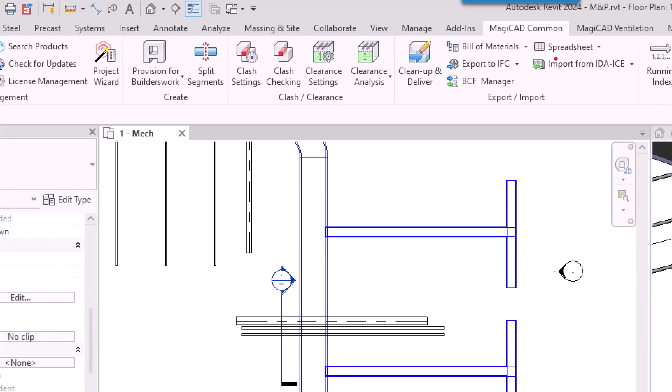So here, you can find this kind of function from MagiCAD Common. You can find a lot of useful functions here, like provision for Builderswork, clash checking, clearance analysis, and some kind of spreadsheet. A lot of useful functions here.

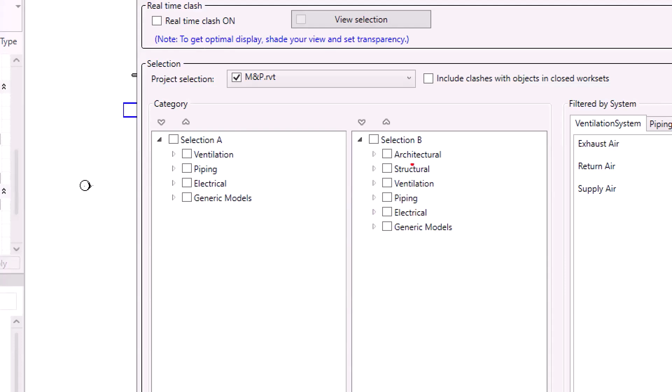Okay, so for this function, I will go through clash setting, and I want to check clashes between different disciplines. On the left side is for the MEP disciplines, and on the right side is for MEP and architecture, structure, all of disciplines here. So I want to check clashes between ventilation, piping, and also between ventilation, piping, and electrical. I want to make clashes, I want to check clashes between them.

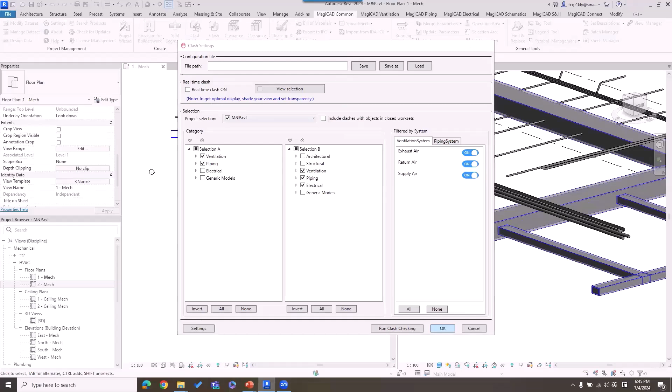And here you can find we also support clashes between the current model and the linked model. So here I can do clash checking for the current view, check clashes here, and get a report. With this report, you can check the 3D view for each clash.

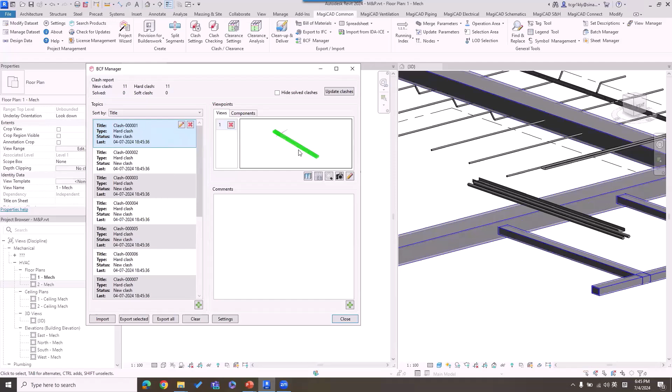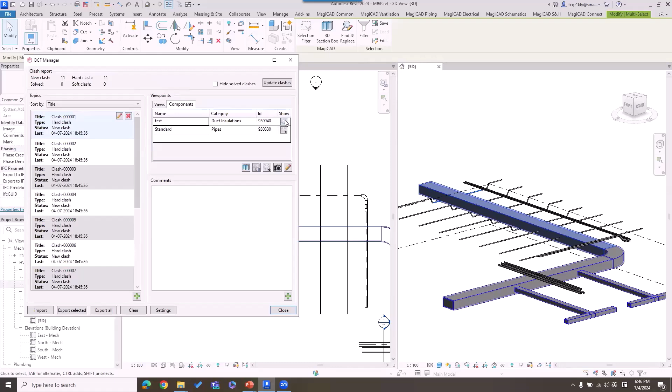Here we have this function to show the clash related elements, and it will locate them in the current view, like this one in the 3D view, for example. And I can also locate those certain elements like this, so that means you can find all of the clashes.

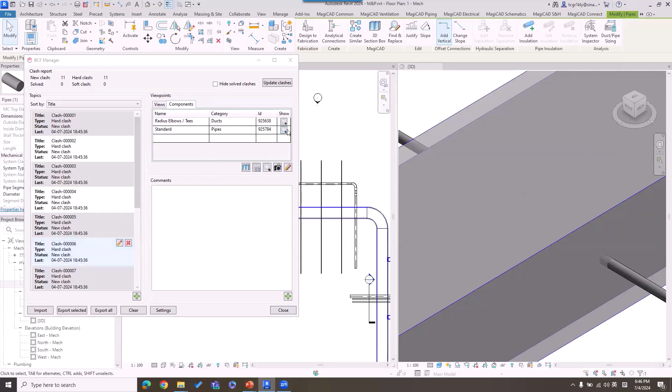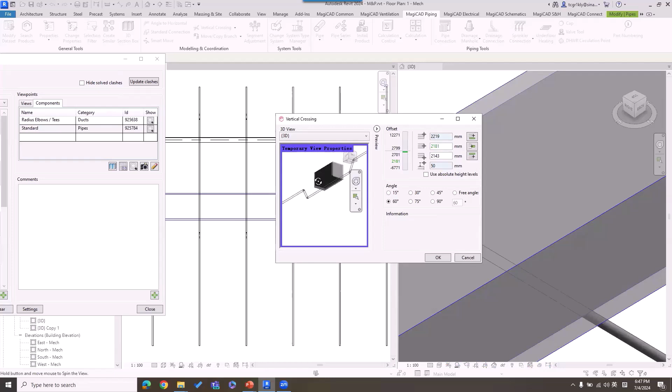For example, let me take some clashes here as an example. Here is a clash, and I want to fix it. You do not need to close this dialog. You can just locate certain elements in the current view, and then use our function like vertical crossing, and start from here to there, at the bottom of the reference one, make a crossing like this.

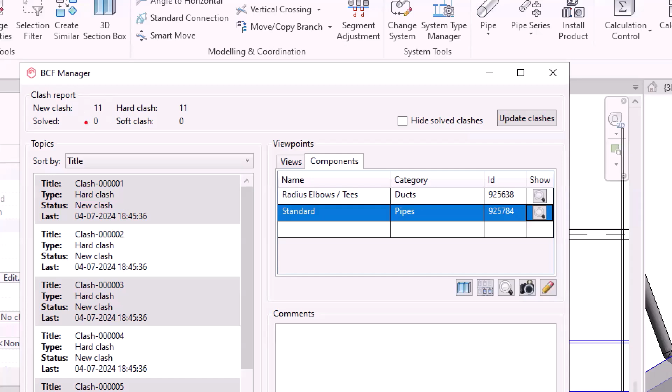Okay, I fixed a crossing, right? After I click close, let's check what happens to our clash report. At this moment, there are 11 new clashes here. New clash number is 11. And here we have the update clashes function, update, and check the result here. You'll notice I have solved 2. So that means you can check clashes in your project, fix them according to the report, and also update the report. So that is our clash report function.

And for this clash report, we can also export to other formats, like BCF format, Excel file, PDF, or printout. So it's quite useful for your daily work because you can almost give up Navisworks. In the traditional daily workflow with plain Revit, you always export the model to Navisworks and do a clash report there, then find the clash according to the element ID. But with MagiCAD, you can just do as I showed. So that is our clash report, clash checking function.

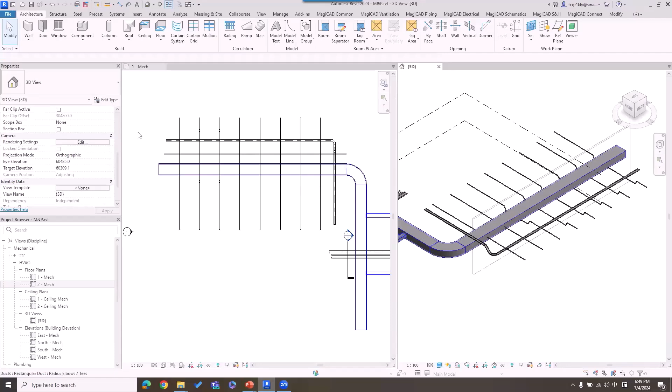For the second one, provision for Builderswork. In the real project, we also have clashes between MEP elements and architecture elements. So here, if I draw something like this, like a wall, a segment of wall here in this view, and change the 3D view to coordination, you can check - here we have some clashes between MEP elements and architecture elements.

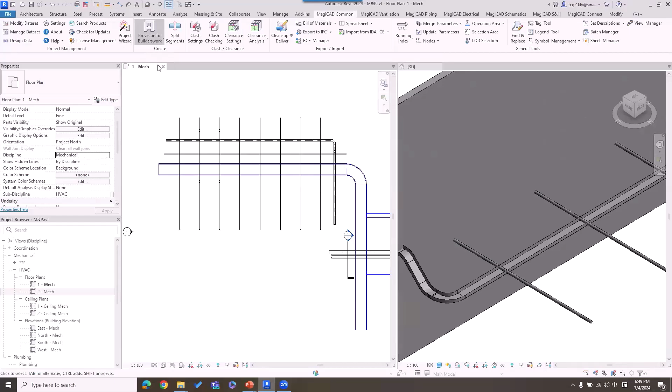So here we can do like this: provision for Builderswork, automatic, and just create openings for the current view. Okay, some openings will be created automatically. Then wait for a few seconds, and you will check the result in the 3D view like this.

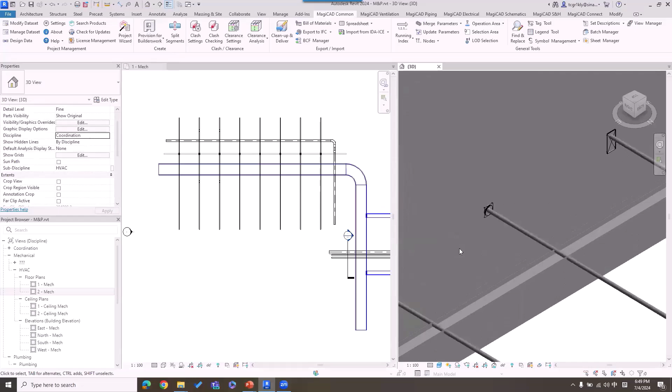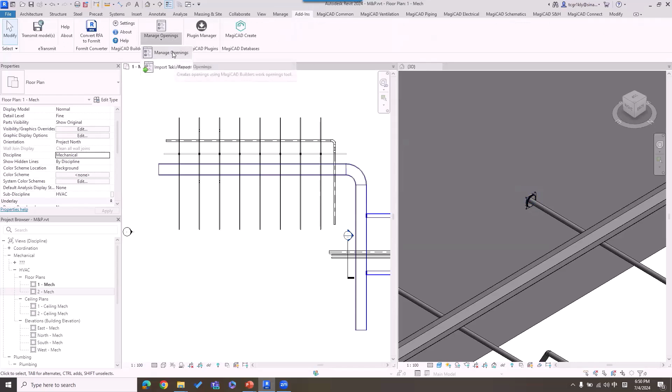And it's like a space holder because the current model is the MEP model. In the traditional workflow, MEP engineers only have access to create openings just as information, not to create a real opening on the wall. So this is just like a space holder. We also provide another function in the MagiCAD plugin called manage openings, used to create real openings on the wall by the architecture engineer. So that is our function of provision for Builderswork.

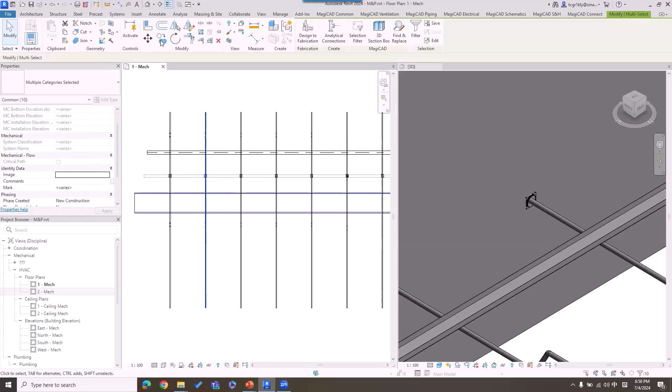And in the real project, you always make some changes after that. So here, what we can do is like this: for example, I move the pipe from here to there, do some changes, and check the 3D view. I move this one from here to there, and if you check the 3D view, okay, the place of the pipe has already been changed.

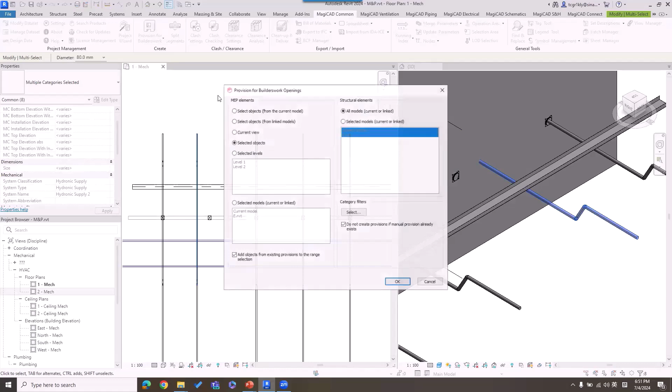Here I can use automatic again and check the current view, and here you will notice one void, one opening needs to be updated. Click OK, and it will be updated automatically according to the change of the pipes or the ducts. So that is our provision for Builderswork.

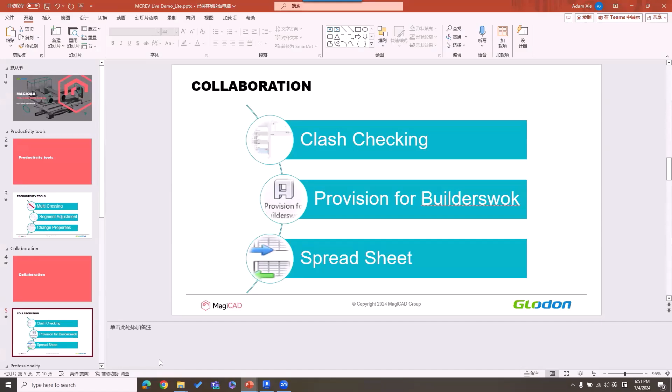The third one is about collaboration, about the spreadsheet. So here we have a function, quite interesting, the spreadsheet. It's used like an information synchronization function outside of Revit. For example, in your real project, if we talk about LOD, a lot of information is required as a result. But if you use plain Revit, you can just select an element, input the value, then select another element and input the value again - it's a nightmare for your daily work, right? But with MagiCAD, we provide a simple way: the spreadsheet.

That means you can export all of the parameters to an Excel file, then type in the value there, and we can input the value back. Let's take one parameter as an example - here is comments, it's empty at this moment, the value is empty. So I take this parameter as an example.

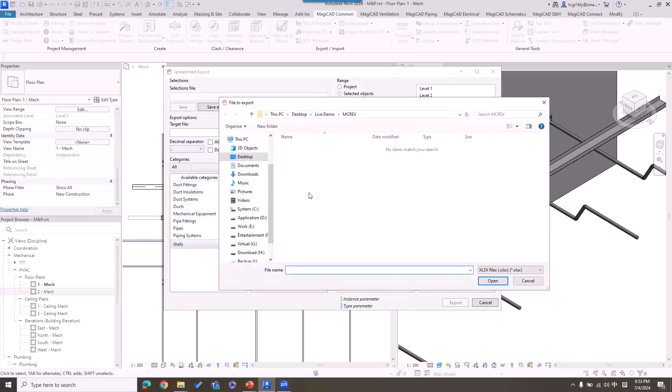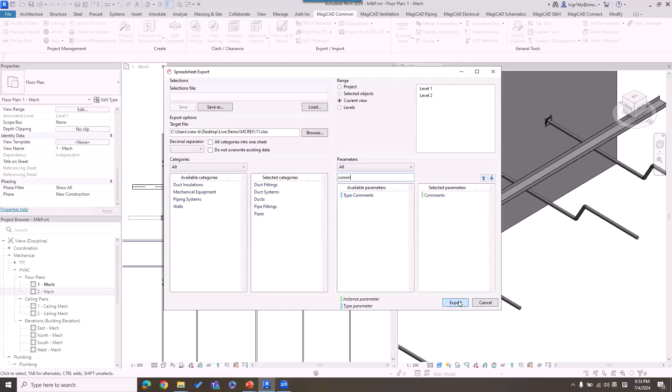I use this spreadsheet function, export, and find somewhere to save the spreadsheet. For some categories, find a certain parameter, comments, and export. Then I will get this spreadsheet - it's an Excel file. I open it, and then I can fill in those values here, like this one.

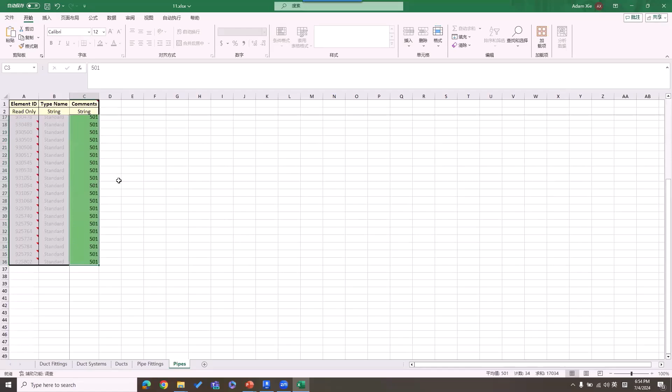Just like a drag down, like this one. I can just input some value here. Okay, for pipes, just input some value, and then save it.

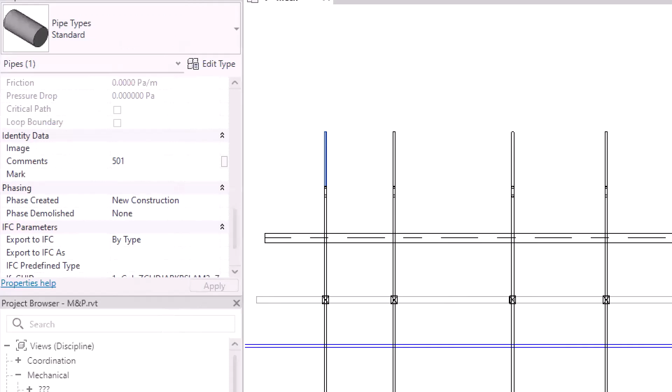And with MagiCAD, we can import the file. Okay, some changes there, accept, and then check the result. Here, if you check the information, here is the comments - that means I input or inject some value for the parameter outside Revit. So here you can find the different values. It's quite useful if you need to provide a Revit RVT file with a lot of information, so you can use this function to inject information outside Revit.

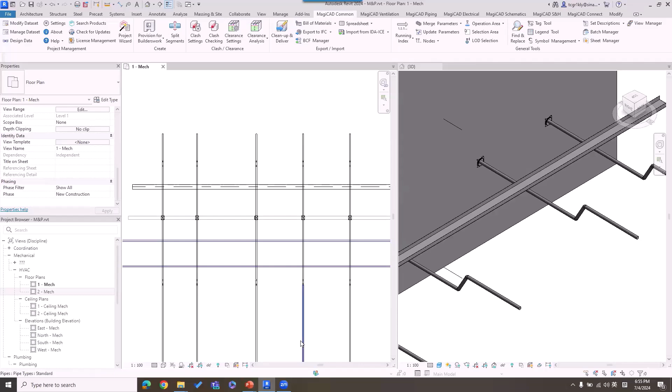So that is our spreadsheet function, and that is the second part of the live demo: collaboration.